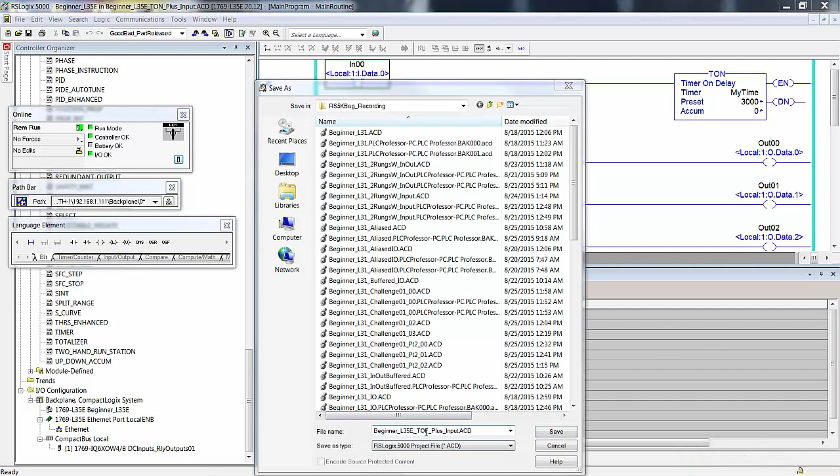I'm going to do that. And you see that it's simply a matter of changing the N to an F on the existing file and saving it. All inputs off. Offline or online, your choice for the next edits. I'm online, so I'm going to keep it online.

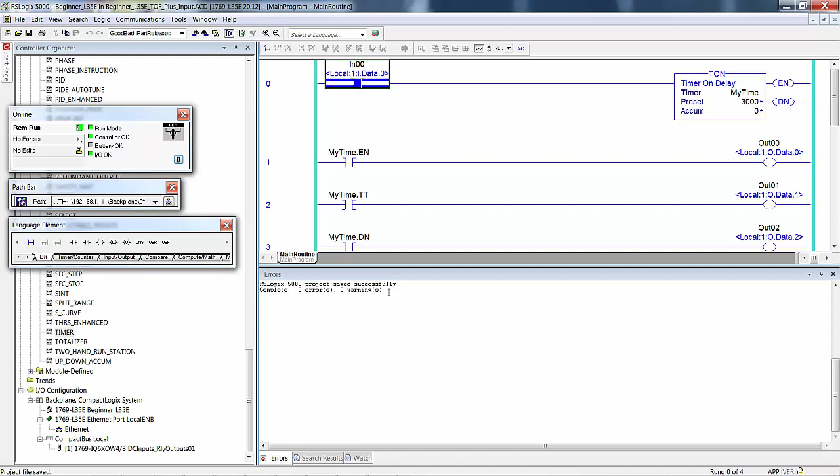Now remember that I have my display here all kind of skewed around. I have things stretched. I have things up a little higher. I've moved the toolbars around to allow more space for my logic, so we can see the logic and we can see the bits in the watch panel. So you see what I did, and I could go one more further and move these down here and get even more height, but this is enough for right now.

So what I had you do was put this in the edit mode. If you're offline, you don't have to put it in the edit mode, you just start editing. Double click on the instruction. I can drill down and select a TOF, or I more simply just backspace, type in F, enter. That data type, my time data type timer, scope, main program, that's not an undefined tag.

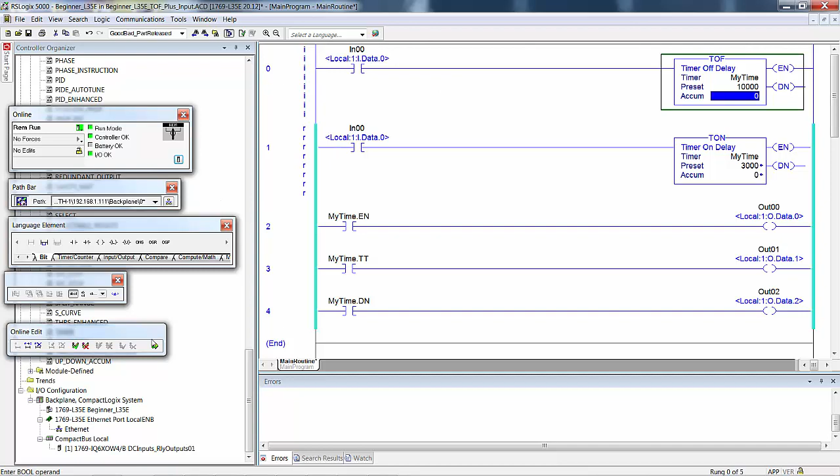What you just witnessed, because I changed that instruction to a TOF while online, even though the tag was defined, I had to type in the preset and the accumulate before it would accept it. If you did it offline, you ran into less trouble. So let's finalize all edits. Remember, my toolbars are all moved around, so I have to come over here to finalize all edits.

Drag this back up, go to the watch panel, so I can see all my logic and I can see the data table in the watch panel down here. In the online run mode with your new logic, make a note of the state of the bits that are now controlling outputs on your output module. Once duly noted, toggle input 0 on again and watch the bits.

I've already triggered this thing because I turned it on. Notice that it's not timing. The enable bit is on and the done bit is on. So if you're thinking, wait a minute, how can it be done if it hasn't timed out? Well, that's exactly how it works, and that's why I don't care for this instruction, but don't let me bias you. We're going to go ahead and examine this instruction.

What I don't like is that the done bit comes on before the timer is timed out. But it's the way the timer data type works, and that's what we have. In what order did the outputs come on? Watch and think carefully. Leave blank if no change in state.

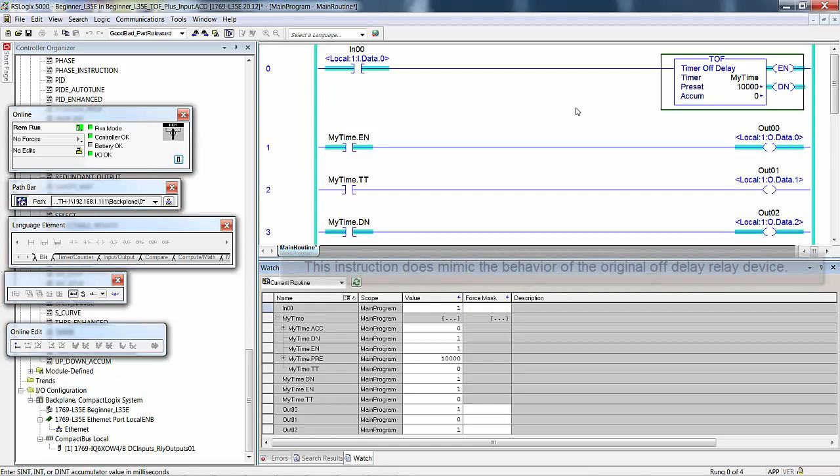So I'm going to turn this off, let it time out, so we can get back to the beginning so you can watch it again. Now we don't need 10 seconds. I'm going to reduce this down to 5,000 milliseconds, thousandths of a second.

And right now, with the rung false, all the bits are off. It's not enabled, it's not timing, and it's not done. When I flip it on, the enable and the done bit come on at the same time. The question in the book, in what order did the bits come on? Well, the enable and the done bit came on simultaneously. We'll write a 1 next to done and enable.

Now, let's turn the switch off in the timer timing bit. Now let's see what order they went off in. Well, that was too fast for me, so I'm going to do that again. 5 seconds might be longer than we need to wait.

I'm watching very closely. Well, it's hard to say. What order did the outputs go off? Well, the enable went off right away. See? So the enable bit was first, and I would say that the done bit and the timer timing bit were simultaneous. You could logically say that the timer timing went off first, then the done bit, because when it was done timing, then it was done. I couldn't prove it either way, but either of those answers are good.

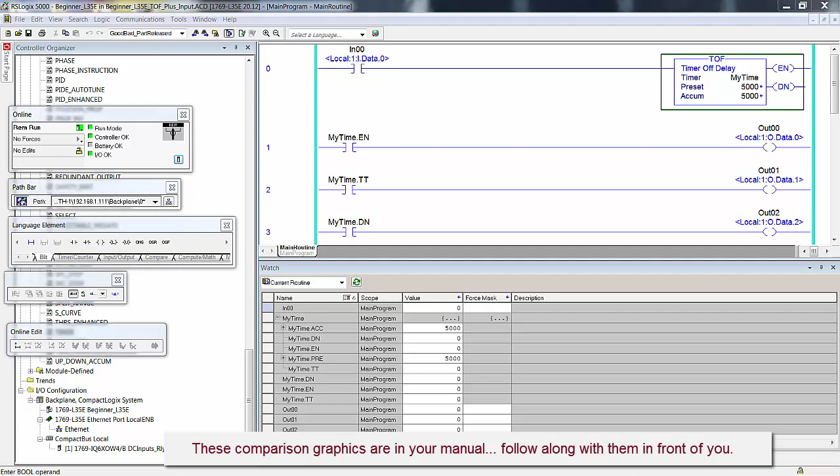When did the done bit set in the logic on the right set of rungs? That would be, when did the done bit come on for the TOF instruction? It comes on as soon as it's enabled. Which 2 bits are in the opposite state? Well, they would be timer timing and done.

When the TON is timing, the done bit is not on. When the done bit goes on, the timer timing bit goes off with the TON. With the TOF, the done bit comes on right away. Then when it's timing, the done bit stays on until the timer timing bit goes off, then the done bit goes off. So which 2 bits are in the opposite state?

I would probably answer that question that the timer timing and the done bit, because they're both enabled. If I enable this, see, the enable is on. So whether it's a TON or a TOF, when you flip the input on and you enable it, that behaves the same, so to speak. It's the done bit and the timer timing bit that don't behave the same.

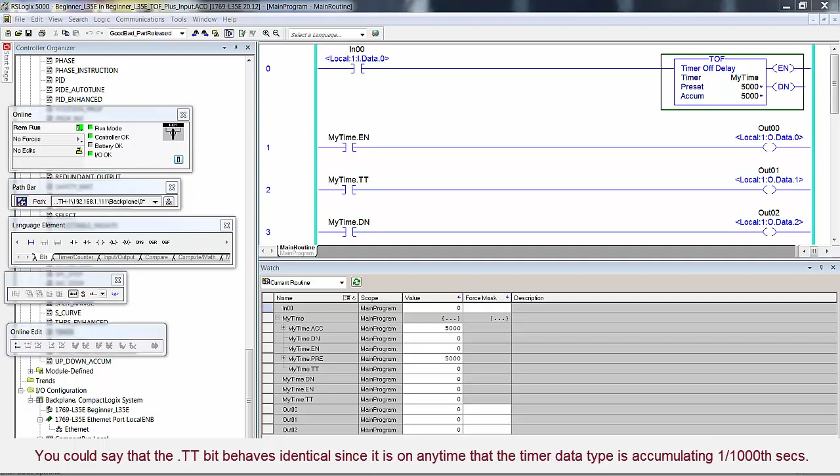After an interval of time exceeding the preset value, are both timer done bits in the on state? No, they're not. When the TON is accumulating, is the TOF accumulating? No, it is not. Which instruction has its timer timing bit in the on state? That would be the TON, the one that is accumulating. The answer would be yes, the one that is accumulating, or the one that is not accumulating, no. So the timer timing bit is always on when it's accumulating.

Which instruction has its timer timing bit in the on state? The answer would be the one that is accumulating, yes, or the one that is not accumulating, no. Did both instructions begin accumulating the instant that we enable the timer instruction? No. Which did begin accumulating when we enabled the instruction? The TON. Which did not begin accumulating when it was enabled? The TOF. And we had some more side-by-side comparisons, and we said, are both done bits on?

Yes, they are. The difference is, when you look at those two side-by-side, the one on the left is the TON. It's done because the accumulate has now hit the preset. The one on the right, the TOF, it's done as soon as you enable it, and it stays done until you disable the rung, lets it time out, and then the done bit goes off.

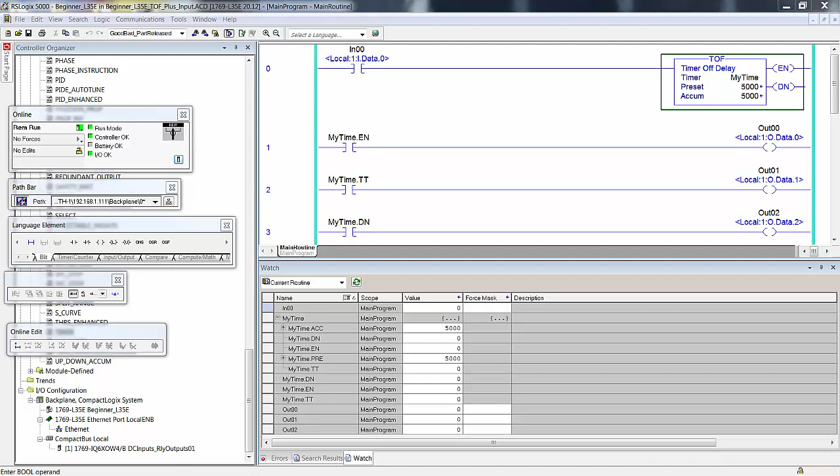Since we can see that the enable bit is on anytime the rung condition is true, we can eliminate the rung that controls an output with the enable bit. We do this to keep the number of outputs used to 4 in this next sequence. Basically, go to this rung right here, select it, hit delete, go down here, finalize all edits, and it's done. We've shortened up our watch panel a little bit, and we've also shortened up our logic. So we don't really care about the enable bit because if the rung's true, the enable bit's going to be on.

Timing events. All use of timing devices, whether a stopwatch or the predefined data type timer, is predicated on an event. There is no measure of time before the event starts, only from when it started or from when it ended. In conventional terms, we refer to this as the leading and trailing edge of the event interval. We had a diagram in the manual that showed a pulse that represented the event interval.

The TON instruction dominates the interval and can be extended beyond the trailing edge of the interval by use of the done bit as a true if off instruction to seal in the TON instruction. Once the TON is timed out, you can use the done bit to keep the TON enabled. The TOF instruction dominates the timeline from the trailing edge to the limits of the instruction's preset value. You see in the diagram we have TON primary, TON extended. The TON primary, that's the event interval. But you can use the done bit to seal in whatever enabled the TON so it stays enabled and stays done, so to speak.

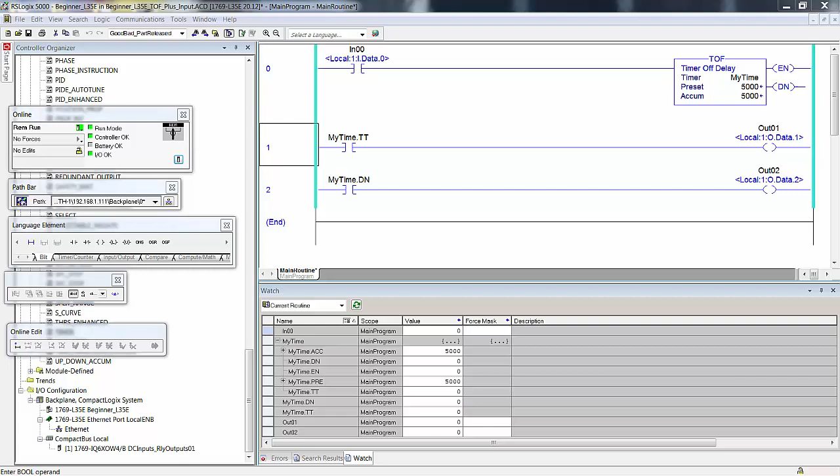Next thing we're going to do is we're going to use a TON instruction to mimic a TOF instruction. In other words, if you're after a delay off, you want a bit to come on and stay on until some delay time after an event left. That's what we're going to do.

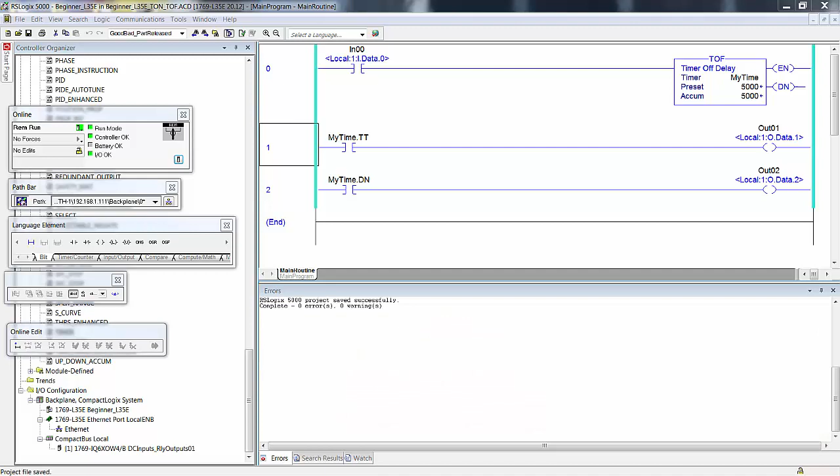The first thing I did is I had you save this current project, and then next we're going to edit the logic. Well, we're slowly working our way to this point in the lab, which is page 196 and 197 or so in your lab project manual, and that is using a TON to mimic a TOF instruction. In other words, how to use an on-delay timer to mimic the function of bits that you get from an off-delay timer.

And I had you edit your logic so you had a TOF and a TON so we can accurately compare them. So if we can get these two bits right here, basically the timer timing and the done bit, and their influence on these outputs. So if we can get these two outputs down here, output 2 and 3, to behave the same as 0 and 1, then we have the TON instruction programmed to behave the same as a TOF. We get the benefit of an off delay, but we don't use the TOF.

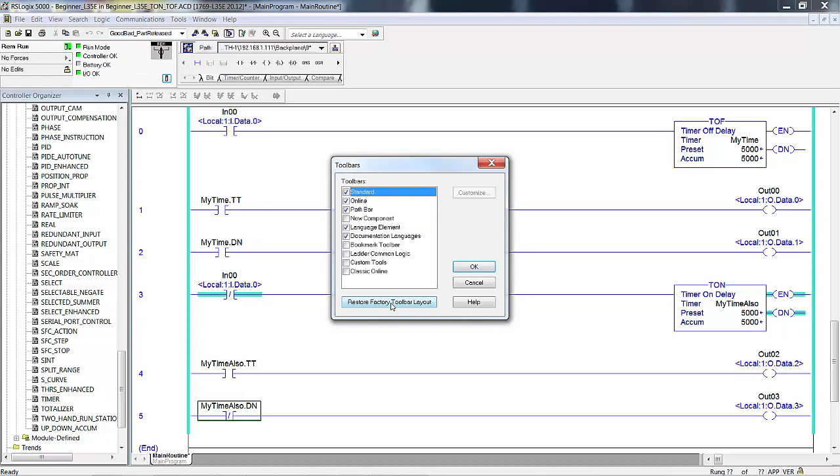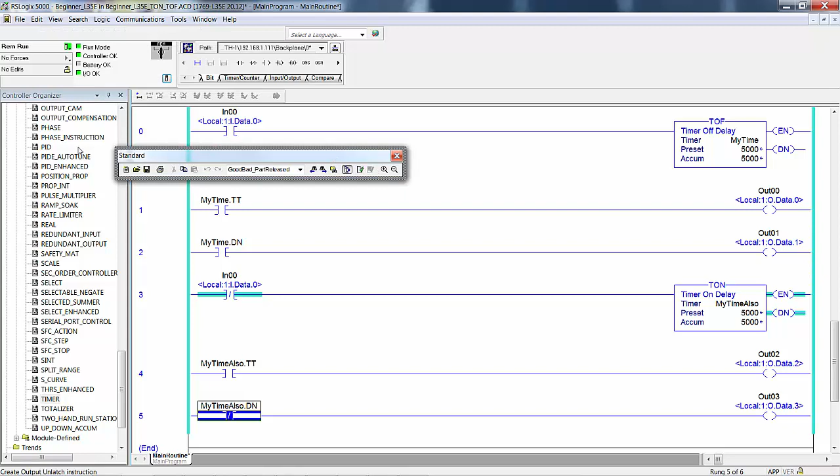However, before I get there, I had gone to View, Toolbars, and I had restored the factory toolbar layout. And it moved everything back where it was. However, we do want to get the maximum vertical space for our logic. Some of these toolbars, we can move them to a different location. See how it goes vertical there? Now it's over here. By all means, play with your display. Now this one right here, I'm going to drag it out of there and I'm going to close it because I don't need documentation languages.

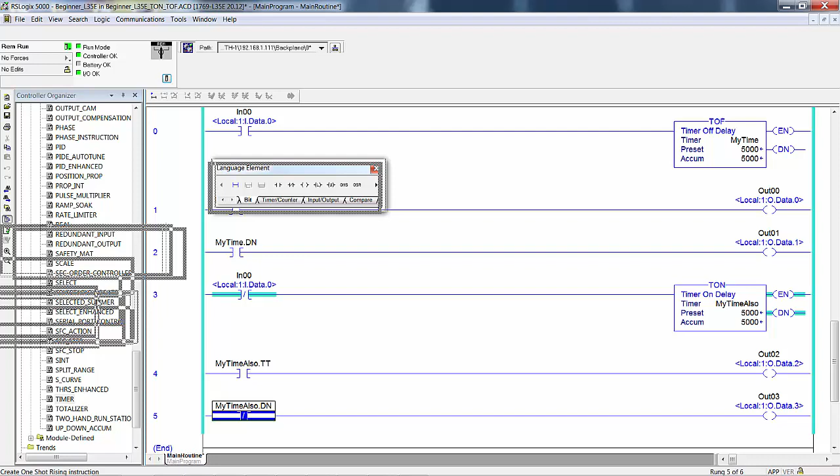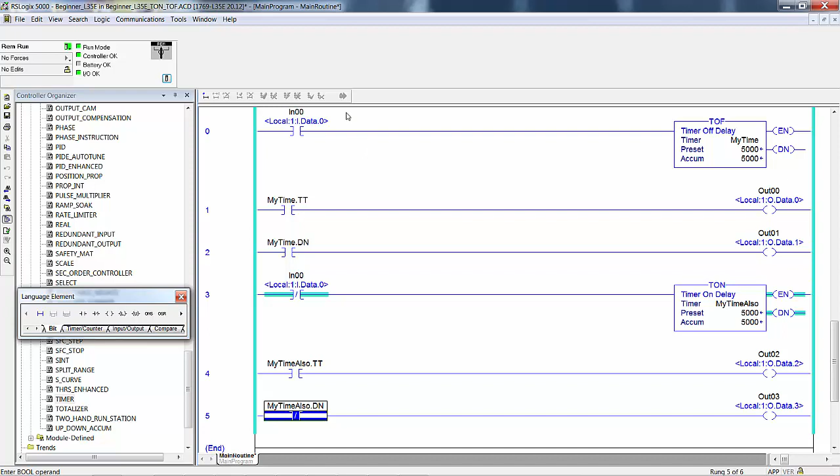This one, we do need that. We occasionally need to go up and get an instruction, and so we can drag it off to the side here, and we can drag this over a little bit. We don't need that much horizontal space. And this path right here, we really don't need that, so I'm going to drag that down here, then hit the X to get rid of it. This is not a bad idea to keep it, but we can move it over here so it's out of our hair. And see, there's the Finalize All Edits button, Start Pending Rung Edits. This is your menu for picking instructions.

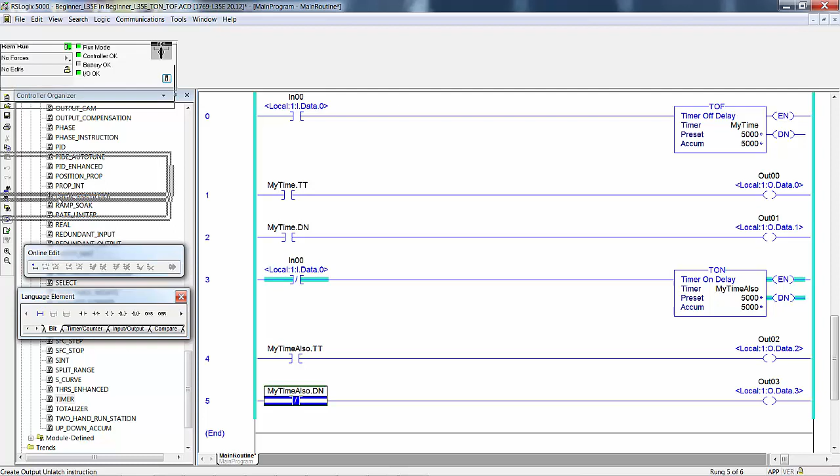And then of course the online toolbar, we can drag that out of there. I don't like the way it looks on the screen here. You can't really tell where it's at. I guess that's close enough. So now you see we have a lot of vertical space here. This toolbar right here you can't move, the main toolbar or the title bar. So this is as much vertical space as you can get.

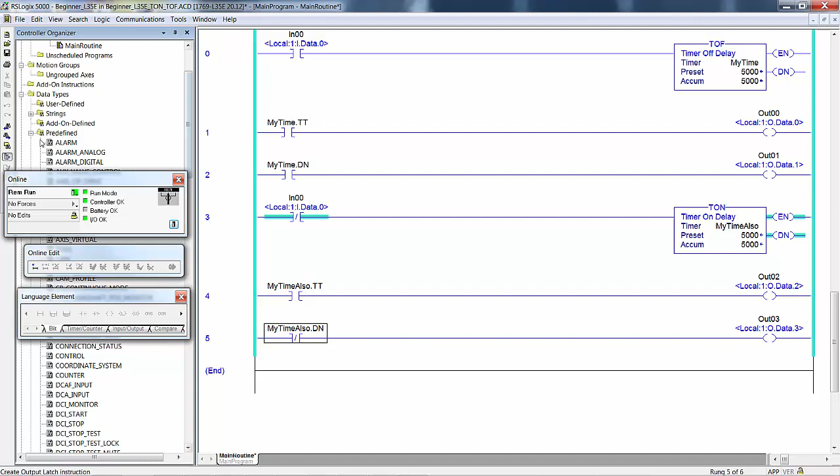And you will get used to seeing these over here. And by the way, if you click behind them, they don't disappear behind the controller organizer. And you can close the controller organizer as well if you need more horizontal space. And really, there's nothing over here that we access that often other than double clicking on program tags or controller tags as we're doing these labs. I'm going to move this over just a little bit. Too much. Here we go.

I had you save your project as beginner, your processor number, TON, TOF. Edit the logic as you see right in front of you. Go online with it in the run mode. All inputs off. I look over at my digital field device simulator. All inputs are off. And I'm in the remote run mode, you can see right here.

And I made a point in the manual of making sure you understood that it's the comparison of output 0 to output 2 and output 1 to output 3 that we're mainly concerned with. In other words, we're controlling these bits as the result of this logic, and we're controlling these 2 bits as the result of this logic. And both of these groups of rungs, these 3 rungs and these 3 rungs, are controlled by the state of input 0.

Now the first thing you probably noticed is that here we have inverted. So this was a delay off, meaning that we turn this bit on and really nothing happened other than the enable bit came on, the done bit came on. But when we turn it off, that's when things happen. This rung is true when you turn it off. So that's the first change we made. The other change we made was with the done bit. You see with the TOF, when you enable it, it's done.

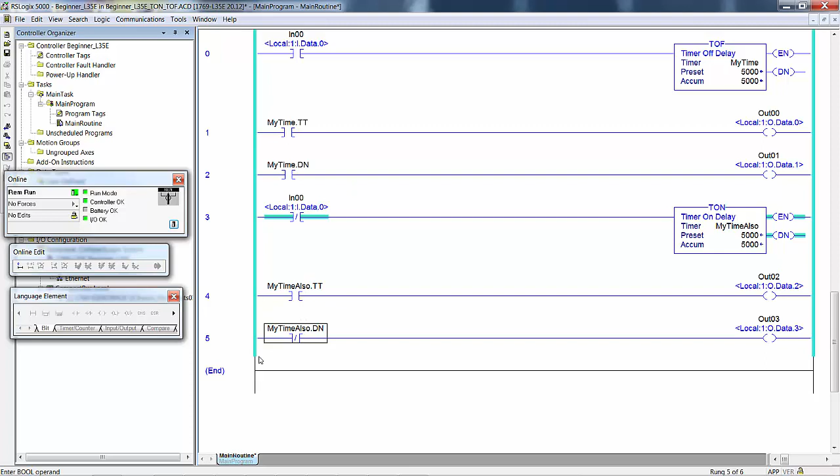If you want to use a TON to delay an off state after an event, input 0 switching to the off state, which conditions do you invert in the logic? Well, we've mentioned that several times now. You want to invert the rung condition for the timer instruction and invert the instruction that reads the done bit to control your final device.